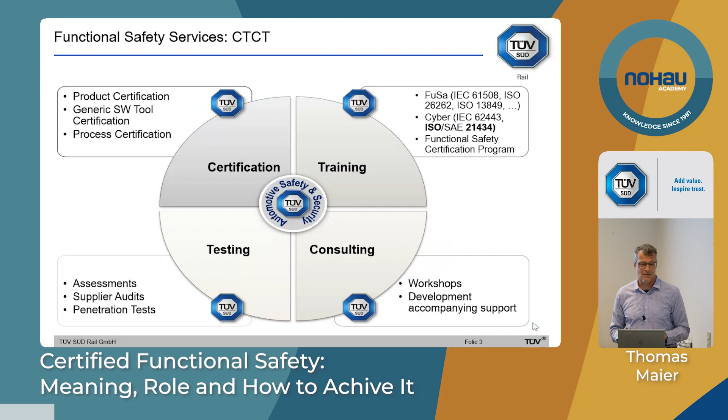And then we have a bit more informal services. We could call it advisory, more informal feedback, analysis, testing. So we do that kind of consulting or advisory to the extent that, of course, our status as an accredited certification organization allows us. We must not violate these requirements of independence and impartiality. So what we do is the same thing, the same activities that we also do for formal certification, just in a more informal way. That's what we can offer as advisory services.

All right, the agenda for today, or the topic, is certification, functional safety certification. So what is suggested is that we have a very quick introduction to the basics of functional safety. I'm pretty sure that many of you have quite a good understanding of what this is, just to set the framework for the rest of the discussions. What is it? What are the major challenges? And then in particular, we want to focus on assessment. What is that, and what is certification in that context in particular?

Ideally, something very similar. And we'll then also speak about what could be motivations for certification, why you want to do that. Also a little bit what TÜV SÜD wants to achieve here, what TÜV SÜD sees as an added value—so a bit of commercial talk, I think must be allowed. But yeah, we think it's a good service, so I will speak about this. And then in the end, a bit of the experience we have with the many projects we have with customers from all industries, from all over the world, at all levels—complete applications down to low-level elements like software libraries and hard soft IPs and so on.

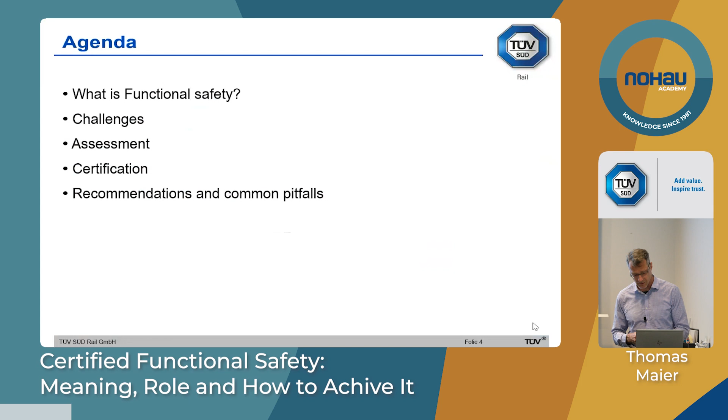Functional safety clearly exists if safety depends on the correctness, appropriateness, reliability, and integrity of control functions, of complex functions inside systems.

Such functions at a high level can be protective functions, functions that you add to a system to achieve safety. This could be typically some things you have in machinery, like light curtains, tread mats, safety doors, and things like this. You don't need these devices and their related function to actually have a productive machine. This is just for safety, just for protection of the workers, of the operators.

The other type of functions which can be critical are, of course, control functions which are essential parts of the product, of the device, of the machine that we're looking at.

A good example for this is, of course, automotive, especially with autonomous driving in mind, where basic driving functions have to be implemented using complex electronics and software. These are functions that must be there in the vehicle, but if they have a malfunction, then of course it will not be very safe. So you have safety requirements on these functions too. Another good example would be avionics, flap control, and so on. These must be made compliant with safety-related standards as well.

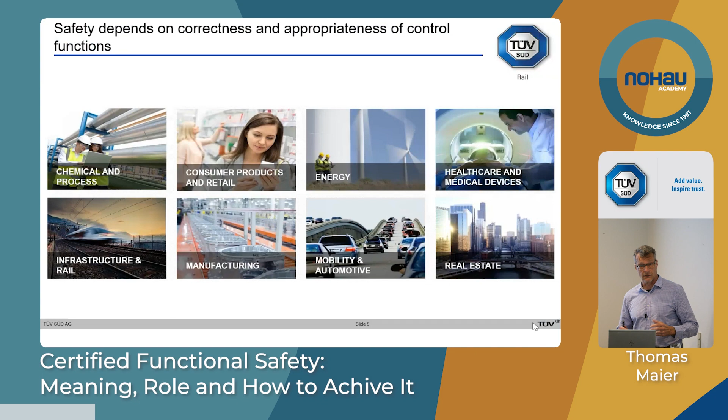The main issue, or the reason we do have functional safety standards, or functional safety as an engineering discipline, is the fact that we try to replace conventional technology, mechanical links between an input device and an output device, by electronic means, by computers and software.

So steer-by-wire, for example: instead of a mechanical link between the steering wheel and the wheels on the street, we got rid of the steering column and replace it with sensors, computers, and maybe an electrical drive that moves the vehicle. So you ultimately could drive the vehicle, the truck, even with a joystick, right? You wouldn't need to have a really mechanical device that gives some torque, and that torque is then fortified, amplified, and transmitted to the steering wheels.

That by itself, one system, is complex. Everyone of you who is an electronics engineer or software engineer knows that is very complex. Complex in the sense that the software that will run on the processors cannot be 100% fully tested. You cannot come across each and every state or each and every path at runtime. So you cannot run a full formal safety proof, product specific, right?

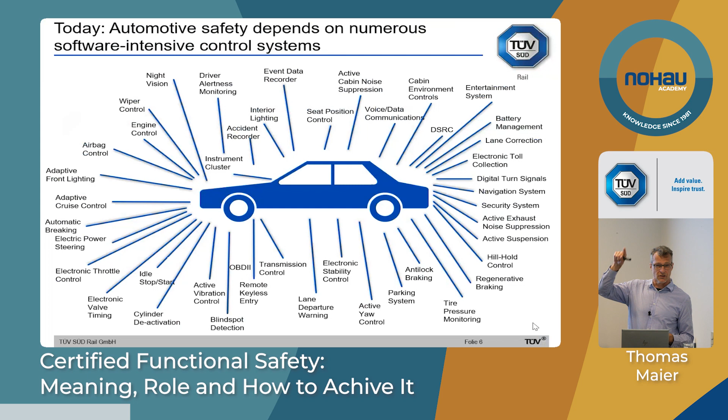And I think that complexity doesn't stop here, it keeps on growing exponentially. I think you had a good presentation by Hult with such an exponential curve for the Internet of Things. Same is true, of course, for automotive.

If we look into the very near future, we have more and more automation, automated driving being currently the holy grail of automotive. It requires more complex sensing, more intelligence, artificial intelligence. And we have a system of systems: a vehicle is no longer a separate machine, but it's interacting with other vehicles, interacting with the infrastructure.

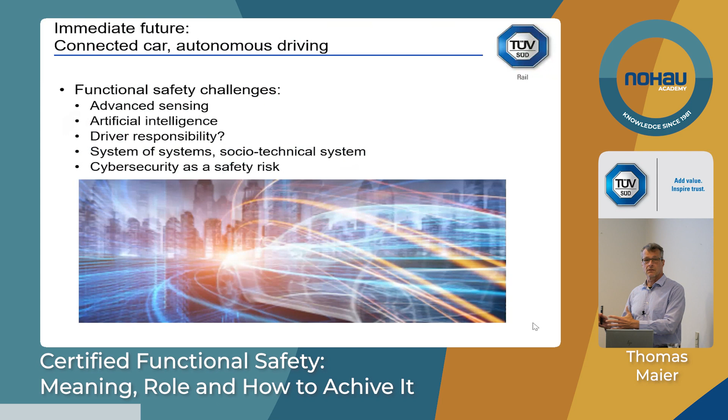To the extent that really more and more it gets clear that the automotive industry no longer can get away with being responsible just for the vehicle and making it safe, but it turns more and more into an issue of public safety, in fact. And this can also be seen in the regulations in relation to functional safety. We'll see that a little bit later.

What are the functional safety challenges?

Again, the basic challenge is complexity. First, that complexity will be a challenge just to identify what is safety, what are the safety functions, what are the malfunctions of safety functions, maybe interactions with couplings between different functions. The very first step, in fact hazard analysis and risk assessment that we need to do, is already more and more becoming an immense challenge in terms of complexity.

In machinery, maybe it's a little bit easier, most importantly because in machinery, if you pull the plug, if you shut everything down, everything stops, nothing moves, then in 99.9% of all cases you're safe. Okay, so that makes it a little bit easy. However, complexity is also increasing here on an application level.

Robotics, we have collaborative robots, complex interaction with the workers, with the operator. We have Industry 4.0, or the industrial Internet of Things also here. A lot of complexity is actually added.

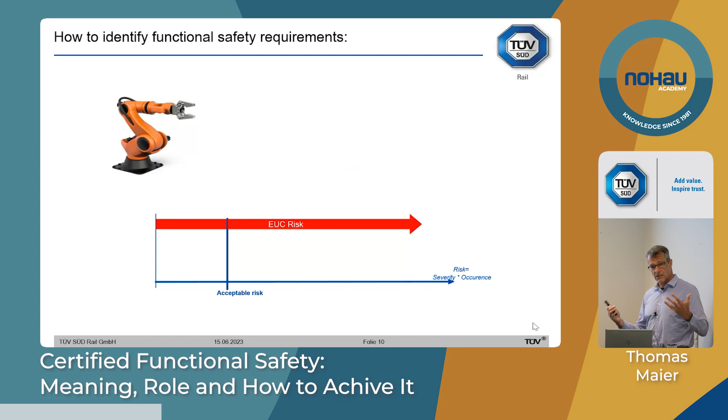But how to conduct hazard analysis and risk assessment, I think in the automation machinery context, it's essentially the standard ISO 12100, which has this approach: of course a robot like this is way too risky, it's a really dangerous machine in fact. You have to reduce the risk to what is acceptable.

What you could do, of course, is put the whole thing in a cage, then not really much can happen anymore. No one can ever get close. No workpiece can be flung off and hit someone either. But not a very usable system.

You want to have a door in that cage because you need to come close to teach, to maintain, to clean, or whatever, from time to time. So if you have just this door, then of course it may happen that you forget to close the door and start the robot up again, or someone is inside and someone else doesn't see it, wants the robot to work again, and switches it on again.

So that the risk reduction is no longer perfect here. To some extent, yes, to a good extent we do get risk reduction from these conventional means, and standards do require to do as much as possible with, let's say, normal, common sense, conventional risk reduction. Inherent safety is another term for this.

Only what you cannot really get rid of in terms of risk, that's where you would need safety guards, where you need protective systems. And these protective systems, typically especially the active ones, of course implement complex electronics. There's some sensing, there's some processing, and so on. Also, that may not be perfect.

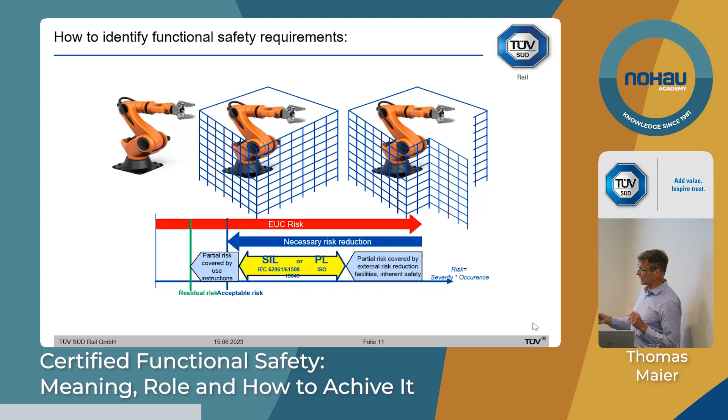The most famous one, of course, is safety integrity level by 61508 and derived standards, product standards. And the other big player in machinery, still dominating I think at the machine level, is ISO 13849 with its performance levels.

In automotive, you have a normative hazard analysis. It's part of the ISO 26262 standard. You always have to do it. First you determine severity, then you determine probability of occurrence.

The particularity in 26262 in automotive is that probability of occurrence is uniquely about exposure. You are only allowed to reason about how long, what percentage of time, or how often the safety of the driver, passengers, and bystanders depends on the fact that a particular function has no malfunction. You are not allowed to consider what is the probability of that malfunction. You may not consider it at the risk analysis step.

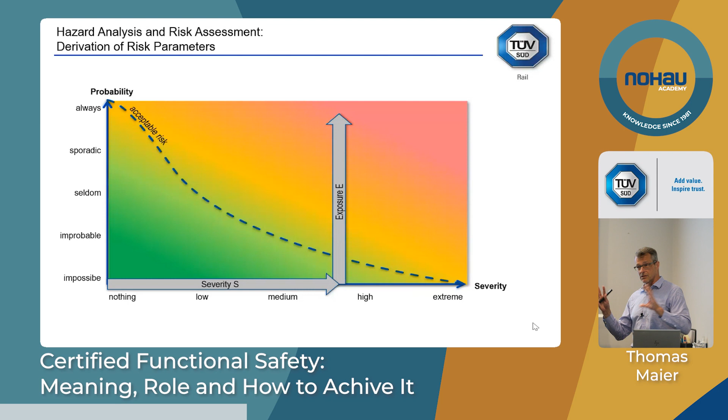How about the other safety goal, to not explode unintentionally? How often does safety depend on this malfunction not happening? All the time. Whenever you sit in front of the steering wheel, your safety depends on this thing not just going off spuriously. So you have an extremely high exposure rate.

And then there's also driver responsibility, controllability. The driver is expected to be compliant with the law, have a driver's license, respect traffic rules, not be under the influence of drugs and so on. If everything goes wrong, in some cases the driver may still mitigate, maybe reduce the severity, or maybe dodge the collision to reduce the exposure. Anyway, you will end up somewhere up here, and this is not acceptable.

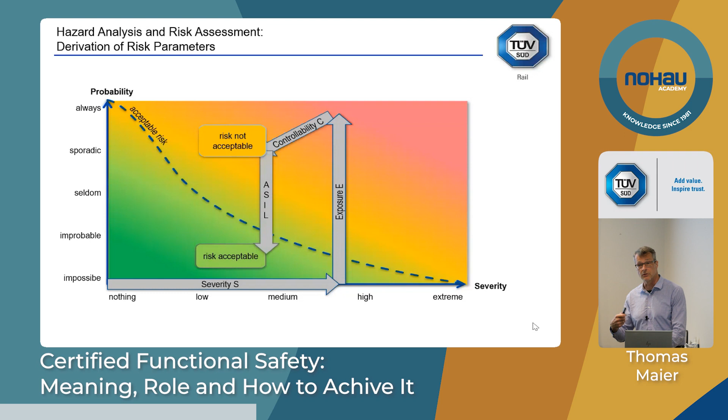And that's now when we reason about integrity. That means that particular function must be implemented with appropriate integrity to reduce the risk to an acceptable level. Once we have identified functional safety - the functions, the malfunctions - and identified the risk level associated with it, then we need to achieve functional safety by achieving that integrity.

And this is really where we can say the SIL, ASIL, or performance level have a double role. Up till now, SIL, ASIL, performance level was simply a metric of risk, or required risk reduction. Now these turn into technical requirements, in order to implement that particular function with commensurate integrity that provides this risk reduction down to an acceptable level.

Safety integrity must mostly be concerned about the fact that things go wrong. In hazard analysis for functional safety, the main hazard is malfunction of an intended functionality. So we reach integrity if we make sure that these malfunctions don't happen, or don't happen too often. So we need to be failure focused.

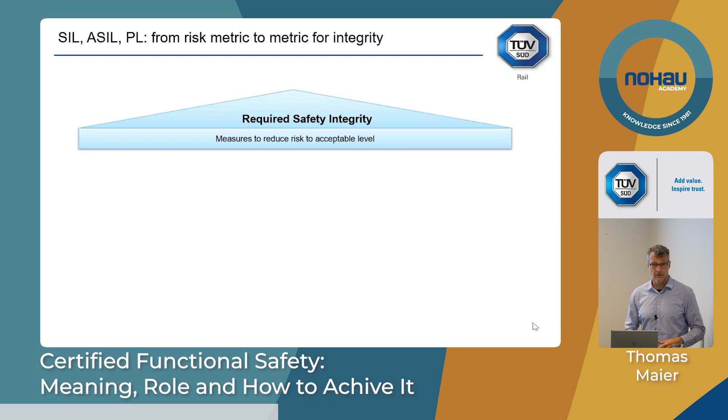That's the fundamental mindset of a functional safety engineer: not to think only in positive terms about the thing you want to do, the great new feature for your vehicle, the great new function in your robot. You have to always think about what if something goes wrong.

So you have to have this critical attitude to your own work. Failures and faults are classified by all standards into two main categories. First, the traditional, classical, old-fashioned safety engineering one: hardware components, and everyone knows these will fail. They have a failure rate, a useful life, a B10 value or whatever.

At some point in time you have a failure, so we must have a design that is prepared for it, that can tolerate it through redundancy, that can detect it through diagnostic safety mechanisms. We also want a good level of reliability of these components. Standards state requirements about such a concept and architecture based on redundancy and diagnostics in a quantitative way. Under a particular SIL or ASIL, you have metrics which quantify the goodness of an architecture to control random hardware failures.

The other type are systematic failures. Why are they called systematic? Because they always occur and manifest themselves in precisely the same way. According to the standard, there is no randomness to it, it's more deterministic: if certain conditions are true, the fault will happen, the failure will happen. The main root cause of systematic failures is not the laws of physics, as with hardware, but ultimately human mistake, human error.

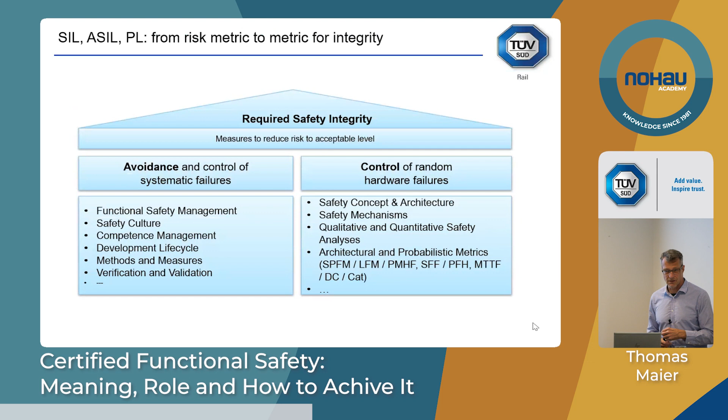How do you avoid making defects, how to avoid making bugs in software in particular? It's hard work. You have to follow good processes, good documentation, try to be formal to the extent possible and appropriate, and do a lot of testing, verification, and validation. These two types of faults are reflected by two types of requirements: process-specific requirements like functional safety management, processes, methods and tools, and product-specific requirements that tell you how to construct a good safety architecture.

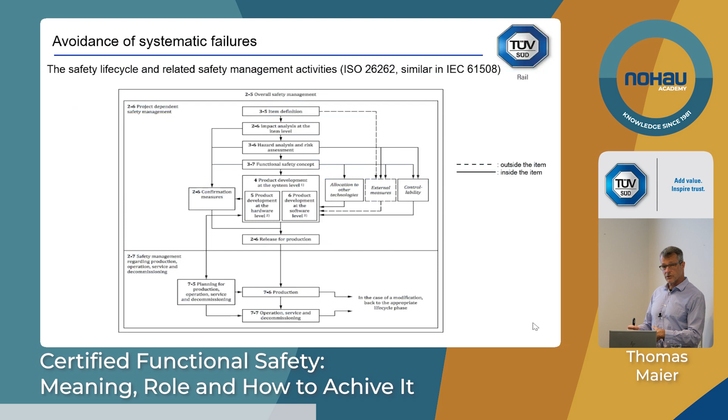Just quickly, some visuals here. We won't discuss this in detail, but for avoidance of systematic failures we have processes, methods, tools. We have a high-level safety life cycle, functional safety management, and based on this we have detailed processes, especially on the software side.

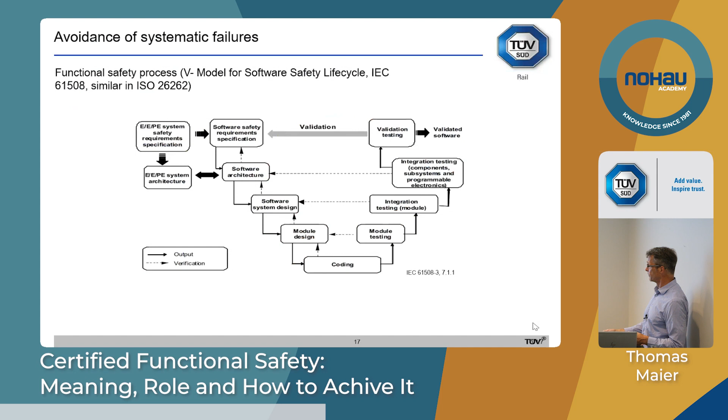That's one of the key aspects of the V-model. Within each of these phases, you have very detailed requirements specifying exactly what techniques, measures and methods you have to apply, depending on the safety integrity level you want to achieve. The higher the safety integrity level, the more rigor, the more highly recommended items you will find in the corresponding columns.

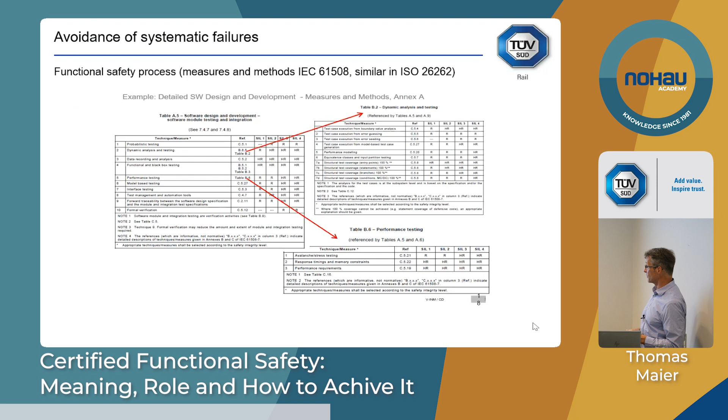And of course, fail operation would mean you cannot just be happy with detecting a discrepancy. You must locate the fault. You must know which of the two channels has faulted.

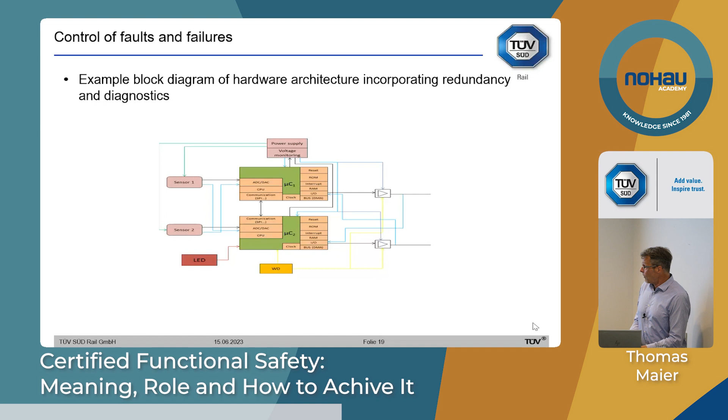All right, so identify safety and then achieve safety. Then we're safe. Are we done?

Not quite, because things change, especially if they're software intensive. They will be modified. The positive view is that you have good interest from customers, and they come along with new features they want implemented. That's the positive thing. The negative thing is that you have field returns and bugs you need to fix.

Doesn't matter, in every case you have change, and a big challenge is to maintain the safety integrity if you have change. And how do you do this? Well, this comes again back to the processes.

You need to have good processes in place, especially good change management based on impact analysis, and such an impact analysis, in order to be able to make it properly, to know what is actually affected, what are the impacts of a change.

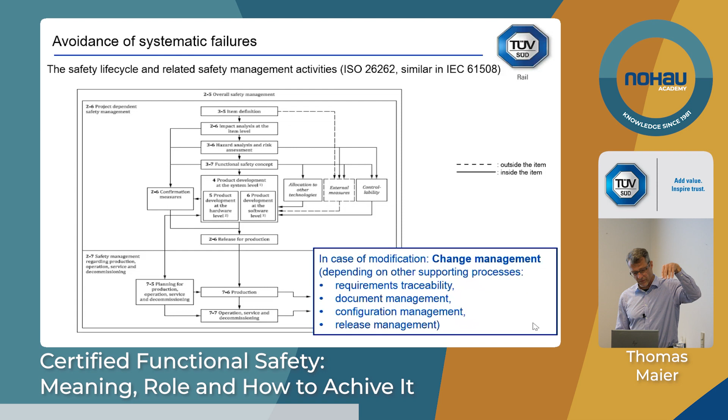We need requirements traceability. That's a key measure, in addition to the V model, which standards require for achieving systematic integrity. And requirements traceability really is required to be white box traceability from high-level requirements, a vertical traceability into the design, into hardware design at the lowest level, into software design, down to unit level, function level, maybe even lines of code level.

Document management, and then also configuration management, release management, to make sure that a particular, fully assessed, validated, maybe certified version is actually released into the factory floor or onto public roads.

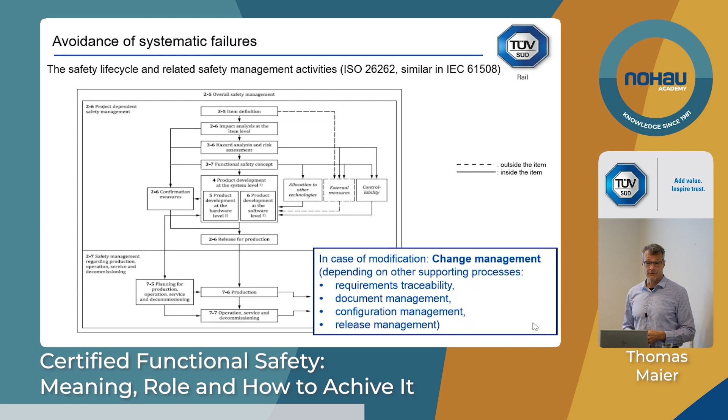All right, then we're done, right? Or is there something missing?

Well, this is very good. However, it's only half the value, or maybe has no value at all, if we cannot demonstrate that we have achieved it, and if we cannot demonstrate that we maintain it. So we need to demonstrate, we need to prove it to ourselves as the manufacturer.

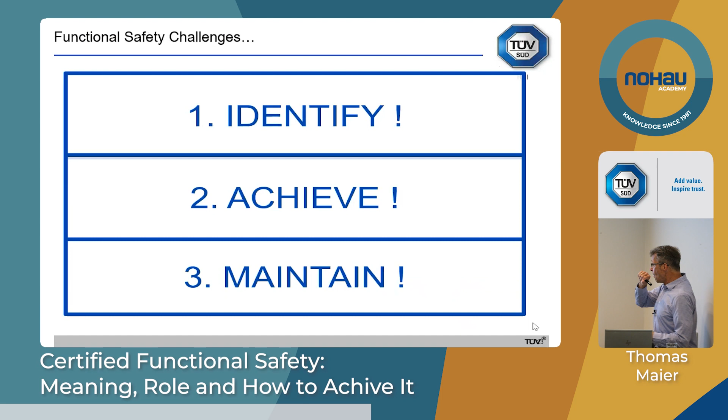We want to have, of course, a safe product. We don't want our customers or end users to get hurt. And we have to demonstrate it.

That's the real challenge because of the complexity. So we have to demonstrate to ourselves, we have to demonstrate to our customers. If things go very bad, we may have to demonstrate to a judge, to a lawyer. If an accident happens and everyone looks for who's the culprit, who has most of the money, I don't know, then we need to be able to demonstrate that we actually have achieved safety.

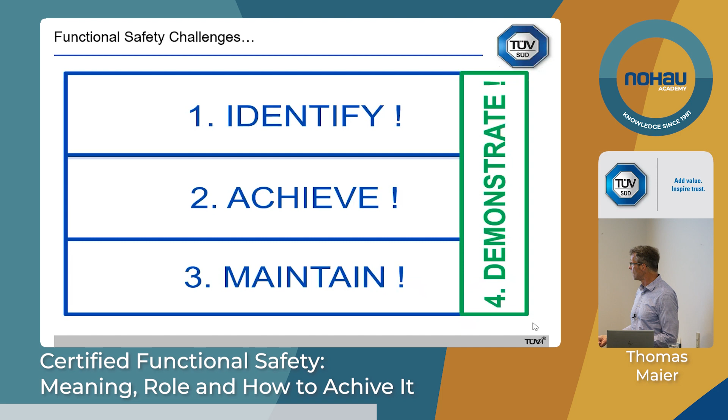And that's where, let's say, the ultimate level functional safety assessment comes in. That's the final, ultimate judgment that a product is safe, functionally safe. But if you try to find out in the standard, try to read them carefully, what actually is required, how do you do a functional safety assessment, what are the precise activities, it's a bit vague.

It's a bit vague, in fact, especially in 61508, I think. 26262, I think, has an improvement here. It does something that hopefully the third edition of 61508 will include as well.

It really says, well, we have to look at the complete body of evidence to come to the judgment that a product is functionally safe according to the requirements. Of course, we have to look at the product itself. We have to test it properly, all the safety mechanisms, safety measures, diagnostics that are implemented.

We also have to look at the complete technical file. All the work product documents that have been created must be looked at. And we also need to care about systematic integrity. We also need to look at the processes, audit the processes, all that. Everything you have to look at.

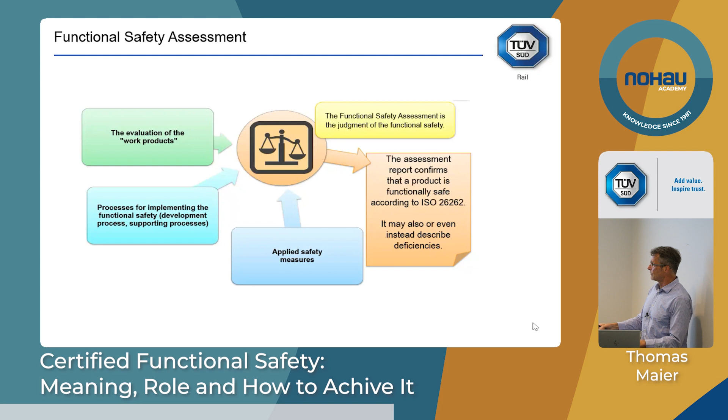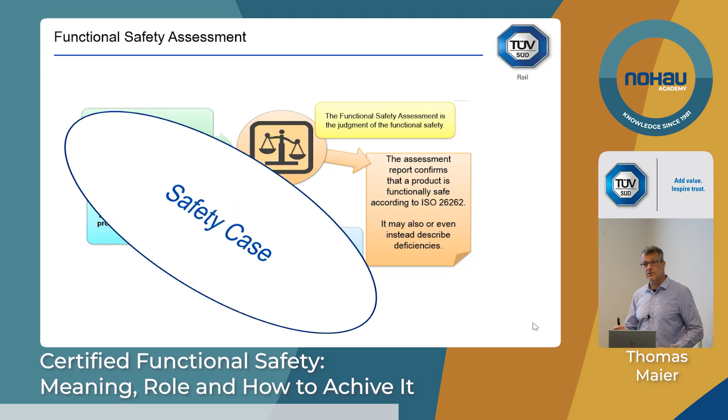And all this compilation of evidence, all this material, should combine meaningfully into an argument. And if it does that, then hopefully you can call it a safety case. That's the term that 26262 uses. It's certainly not one that 26262 has invented. It has been around for many decades, since the 70s, clearly, I would think. But it's about building a safety case. That should give you this confidence, really.

What is a safety case? Well, it's defined in the standard as the combination, the meaningful accumulation of all the work products that you do. That's what the standard says.

For safety case, it's a discipline, safety case engineering, and there are universities, especially University of York, which has been pioneering this work. They came up with a notation for it, Goal Structuring Notation, a really fine thing which you can use to get structure and order in this huge amount of documents that you have to create.

What I'll show here now is not really an introduction to GSN, Goal Structuring Notation, but more a dummy or toy version of it, just to show the important aspects of it.

First of all, you have a claim that ultimately the safety goals or safety requirements that you have identified from the hazard analysis are appropriate, correct, and complete. That you have defined safety correctly, that you have done a good job in hazard analysis.

And then if these requirements are implemented, refined, ultimately designed, implemented, refined completely and correctly, then we have achieved safety. Of course, we need to have some argument in place to support this claim of completeness and correctness as we move down to the lowest level.

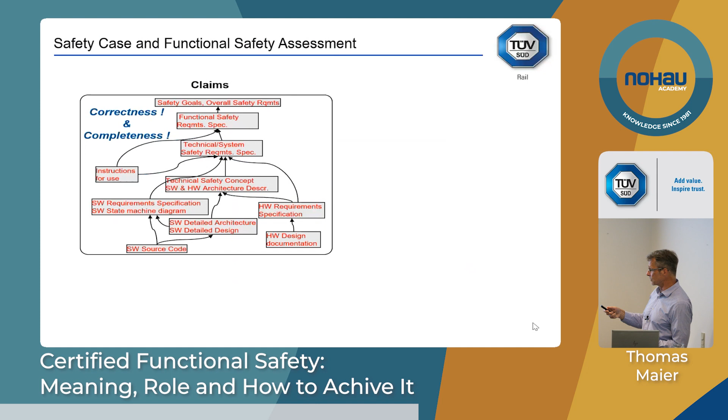These arguments come from the evidence that we get when doing all the verification types of activities, the verification types of work products. That's testing, review, inspection, and also many analyses—safety analysis is in fact a kind of safety-focused verification activity.

Even on the quantitative side, the calculations that we can do based on a hardware component level safety analysis using the FMEDA technique. Right, we're not quite done yet.

There's this word compliance—we still need compliance. Why would we need compliance with the standard, tick off all the requirements, if we have already correctness and completeness in the implementation? Well, it's because the evidence that we have here is not sufficient.

We cannot test 100%, as already mentioned. So we have to rely on processes, you have to do process audits, review safety plans, and all these things. That gives us the arguments for compliance.

Because ultimately, there is no absolute 100% proof possible. The only thing we get is a level of hopefully sufficient confidence. So something that is compliant with a SIL or an ASIL is no absolute term that this is absolutely safe—it's a level of confidence.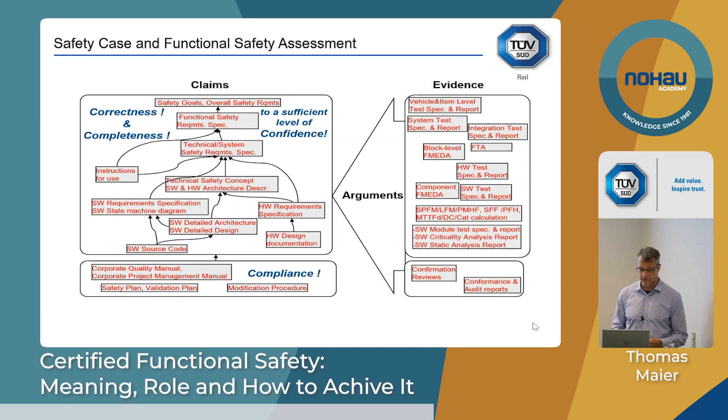Okay, and certification—what is certification in this context? Well, ideally, it's really about achieving confidence. The term certification is not really well defined, especially not in the standards. It doesn't appear anywhere in the standards.

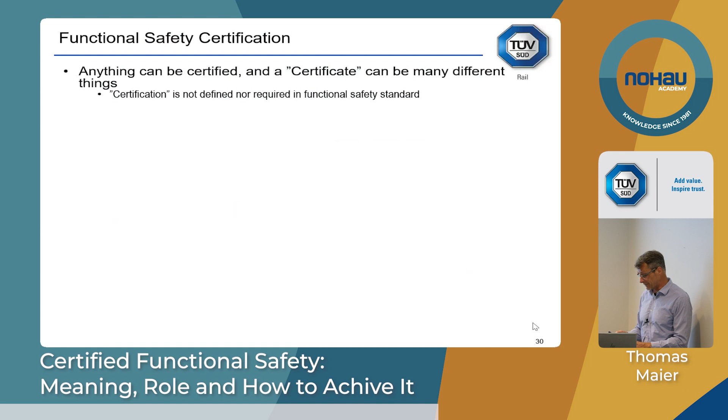So certification can be anything. You can have certificates for all kinds of things. What, of course, TÜV SÜD and all our competitors who are in this area—the TIC area, testing, inspection, certification—

what we would want it to be is clearly a certification, approval, listing, recognition, or something by an independent, accredited, competent, or notified, recognized organization or body—there are different terms for this. Okay, that's what we want to do.

Certification is often required by laws and regulations. Especially in Europe, we know clearly the regulations or directives, and many of those for many years had in fact a direct link to functional safety via the so-called harmonized standards.

You know very well in machinery what these are, and lift directive—there are similar standards, ultimately all referencing the 61508 standard. A bit of a special case in medical devices, the standards can be considered a bit weaker there, but for pressure equipment, ATEX, 61508 is at the basis of it.

Automotive—not sure how many people work in automotive business in Denmark, probably not so many—could keep too strong regulation out; especially functional safety was not really in, let's say, the automotive framework directive until now. Things are slowly changing.

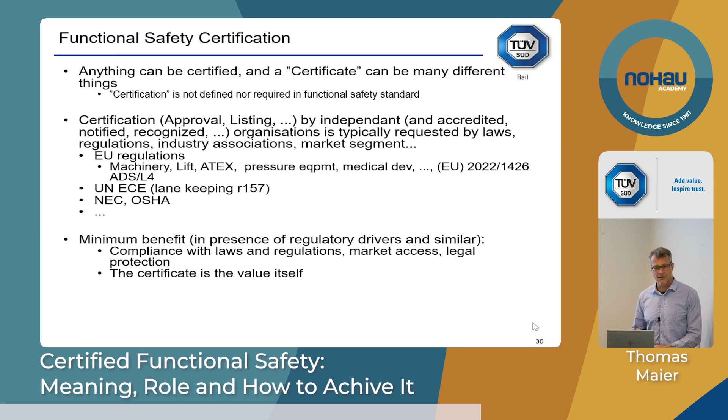So the minimum benefit of a certificate is clearly to show compliance with regulations and laws. That's the minimum benefit. We do have customers from time to time that really just want that paper. Give us that paper, we have this machine that has been safe for 20 years, can you test that it's safe? That's what we get sometimes as a request.

What we think at TÜV SÜD, and what I think also many of our customers think, customers with good safety culture, is that certification should give an increased level of confidence that something is safe. That's what we want to offer as a service, and that's also what we need for our own sake. We need to make sure that the only asset TÜV SÜD has, this blue octagon, is inspiring confidence in safety.

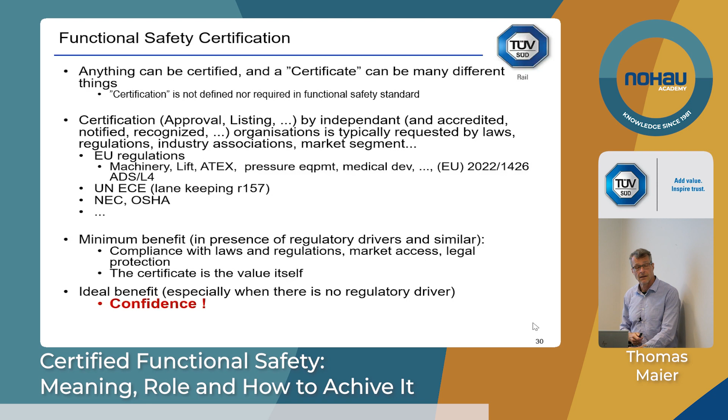What is certified? I've shortly mentioned this already at the start: all these products primarily at all levels, typically as generic components, SEOOC or compliant items. Things like ECUs, PLCs, sensors, drives, valves, at a subsystem level, and then even at a component level, part level, complex ICs, and also software components, libraries, all that.

Tools, as already said, are kind of a secondary job for us, because there seems to be a market drive to have tools also pre-qualified. There's definitely no regulatory driver for this, but the market requires it, and we get quite many projects for tools. Or process, just an organization, as maybe a preparatory activity before really embarking on complex system development and compliance. And this is just training and passing an exam.

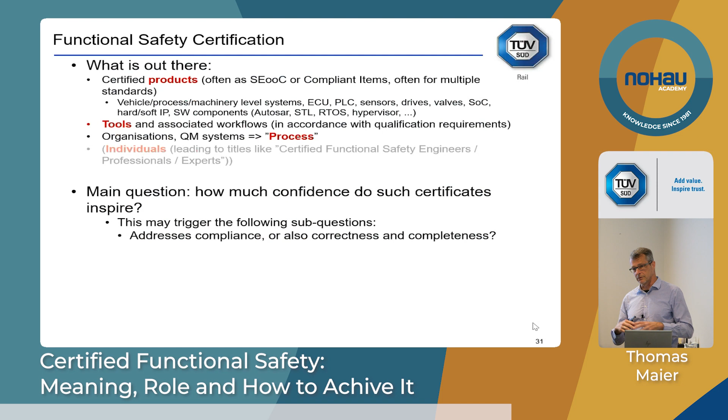If you want to achieve confidence, if a certificate should inspire confidence, how can it do that? This maybe triggers some sub-questions. Does the certifier really go in depth, checking correctness and completeness, understanding the technical design? Or is it maybe more a compliance case? You really cannot know what a certifier does. Do they just tick off boxes and requirements, or do they spend the time and effort to really, in a project-accompanying manner, work with the customer, go inside, understand the complex design inside out?

If you do that as a certifier, if you claim to do that as a certifier, as I would definitely claim TÜV SÜD does, then the big question is to what extent do you do this? You cannot definitely redo the complete verification part of a project, that would be a ridiculously expensive certification project. So you have to get smart about it. This means you have to do spot checking, you have to do sampling, but not in a random way, you have to do it in an informed way. The challenge is to get confidence within a limited amount of budget. Clearly.

And all this is only possible if there is sufficient technical competency in the certification. You must understand the technology, you must understand the application. And also, is it a one-off certification or is it a surveilled one? Is there a yearly follow-up?

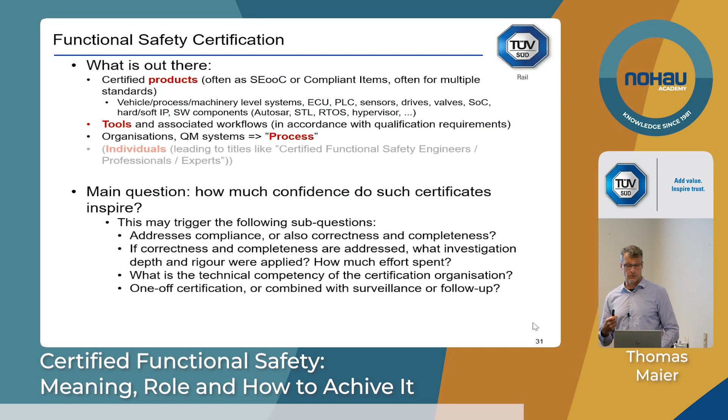What does TÜV SÜD do more in detail? Well, to achieve that confidence, we work development-accompanying from the start, ideally. We cooperate with the customer, give immediate feedback on all the steps, all the products, all the work products or documents that have to be done in accordance with the process of the standard, covering all applicable phases and work products or documents.

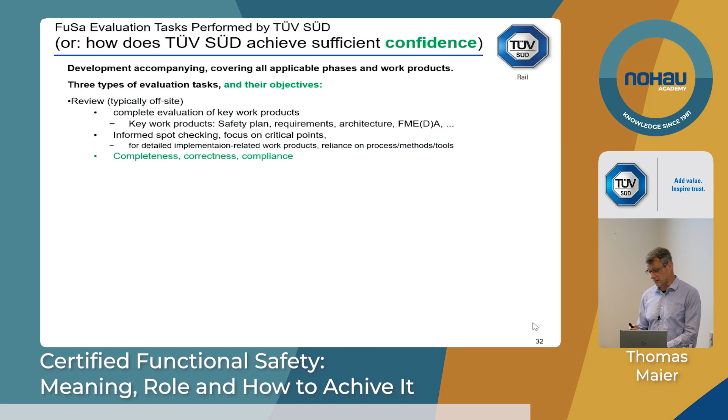Roughly, we distinguish three types of tasks that we do. The most important one, maybe 80% of the effort, really is review - document-based, work-product-based review. Typically this can be done off-site, covering some key work products, especially architectural ones, requirement-related ones, and also analysis documents.

Work products, which also ISO 26262 wants to have confirmation reviewed, so we have an overlap with what 26262 requires there. So we really have 100% review there. We go very much in depth. We need to understand the architecture and the requirements. That's like building a house or a building - the statics must be okay, you have to look at that.

When it comes to more detailed documents, implementation level work products like source code or unit tests, or huge FMEA tables - a controller with 1,000 components, each with on average 5 failure modes, gives a huge FMEA table. So we will not look at every failure mode to see whether they calculated it properly, but we know from our understanding of the architecture where the weak points are, where it's interesting to drill a bit deeper.

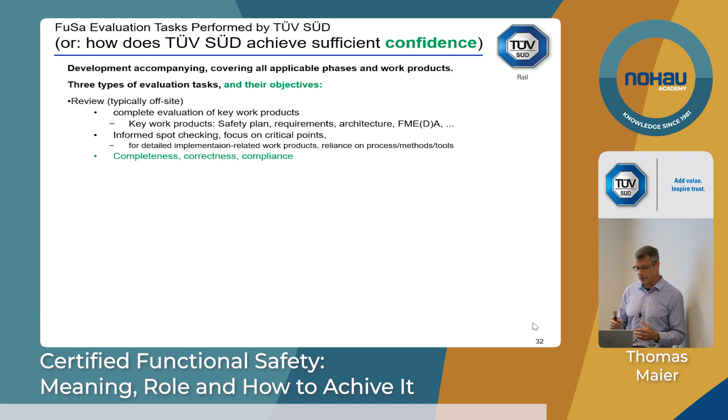We also typically have two on-site activities. One is test witnessing - our accreditors ask us to do that. We select some test cases, go to the customer, and observe them as they are executed or re-executed by the customer. Not to find faults, but to get confidence in the ways of working of our customers. If we should find a fault in this testing, if a test fails, that actually means we have not done a good job in review - this is something we should have already seen, ideally, at review. So this is not about fault finding, this is about establishing confidence in the ways of working of our customers, to whom we want to give a certificate.

And the last one is the auditing aspect. We have a proper audit with an organization, going through the process and specific requirements of the standard, a dialogue with customers. Ultimately, we want to see that there is good safety culture present.

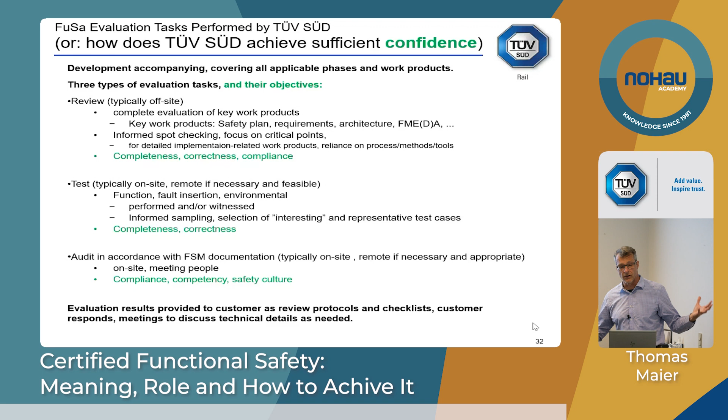We communicate typically by review protocols and checklists - we have a whole infrastructure for it. Review protocols are really used to exchange information, and we capture all the discussions and meetings needed to discuss technical details until all the findings we have are actually resolved. All these checklists and review protocols need a whole infrastructure and process as the basis for our accreditation.

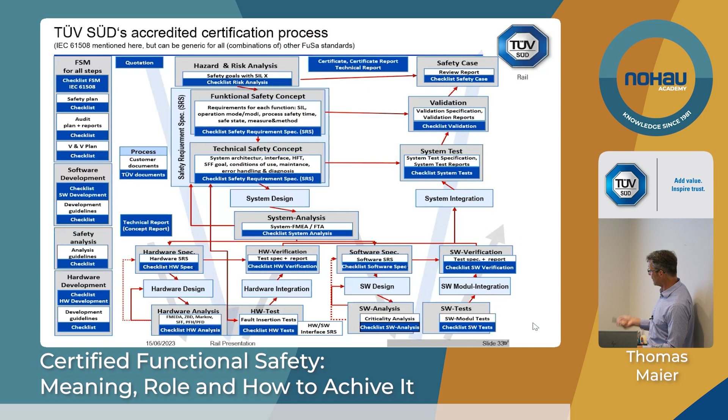That's just to impress you a little - we won't discuss this, but those are all the dark blue boxes showing where we intervene, as certifier, in the project with the customer, where we have a review protocol, a checklist, a test report, or whatever.

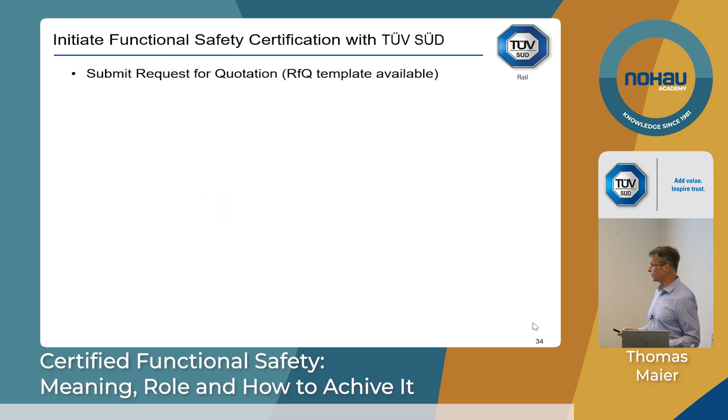How to initiate a functional safety certification with TÜV SÜD, should you be interested: very informal, just an email to me or someone else at TÜV SÜD. We can give you a template for a request for quotation, which has a lot of important questions for us to understand what effort is to be expected to build the confidence. We need good understanding of the product, technology involved, the functional scope and complexity. Also very important, to what extent pre-certified components are used - it's a big difference whether someone uses just a standard processor and develops all the software themselves, or whether they use pre-certified, pre-qualified processors, and pre-certified, pre-qualified low-level software components like HAL or STLs and so on. And also whether it's the first time for you or whether you have some experience in functional safety - that's important too.

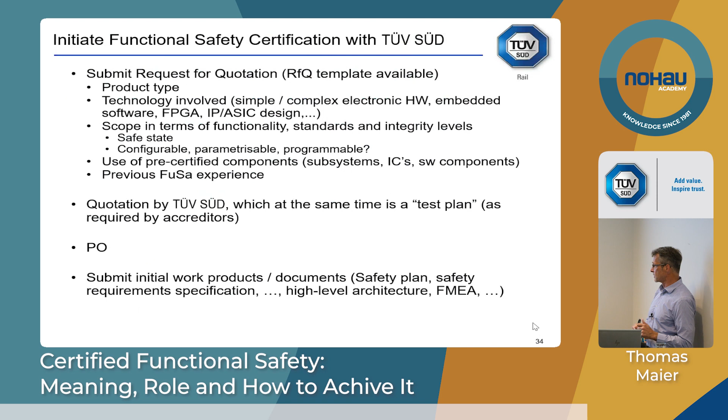You get a quote back, and then you order, and we get started. You submit work products as you do them, following the process, and you get immediate feedback from us by review protocols. So we continuously work with you, accompanying you throughout the complete development project, and we can have all the meetings, even workshops, as necessary to really come to solutions if we have findings that are hard to resolve.

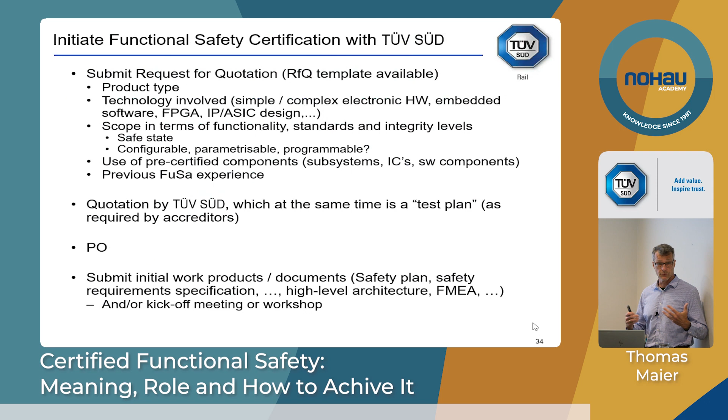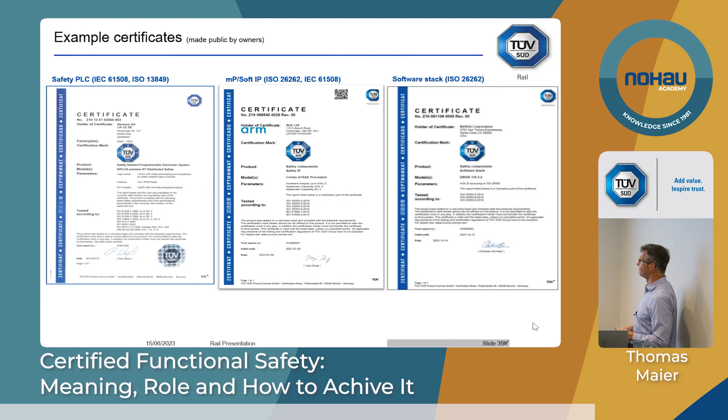And then it may end up with certificates like this, if it's from TÜV SÜD - at different levels: subsystem level, safety PLC, IC level, microprocessor or soft IP as in this case, or also pure software-only components, SEOC elements, like this example here. These are certificates published by the owners - we only publish certificates where the customer wants that.

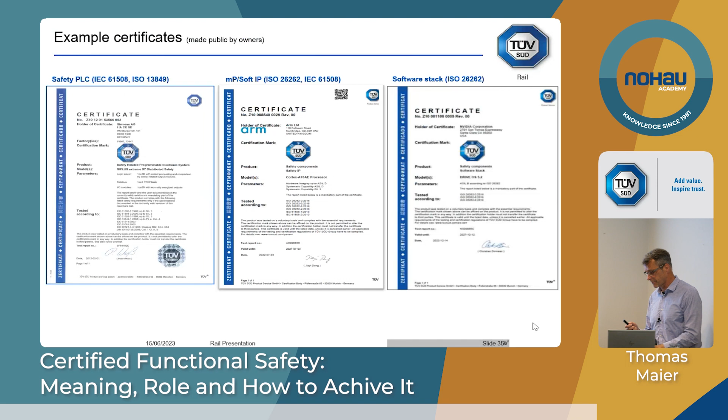Yeah, and the last two slides with some good advice. Many of that is quite obvious, and much of that I think I already mentioned.

Ensure basic understanding of functional safety within your organization. That's important. Training, really, we do recommend it if you're really new to it. That's the basic. Or maybe hire someone who's able to do that, or work with external partners. Involve TÜV SÜD or the certification partner as early as possible. That's really important.

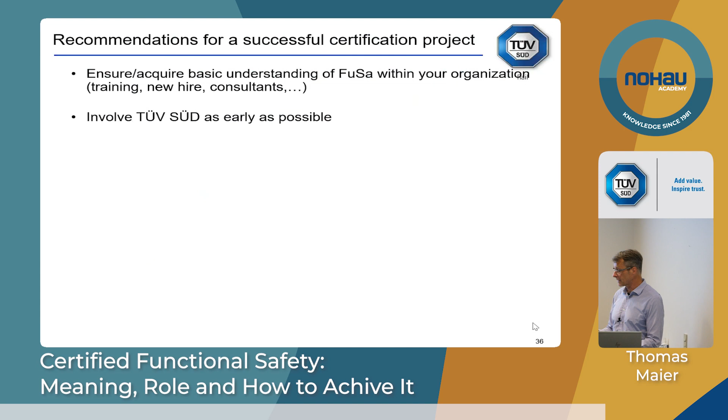Basic quality management should exist. Something in the direction of ISO 9000 with the main supporting processes like change management, release management, also skill management or competency management - all these things that are required by the standard. Ideally, you have that already as, let's say, a quality conscious company, and do not have to reinvent it.

And even further than that, good practice in embedded systems and software engineering should be there too. Good quality, good level of testing, documentation. If you have that, that is 80-90% of the standard, especially on the software side, maybe 95% of the standard. Functional safety standards do not require something out of that that would not be common sense, that would be rocket science.

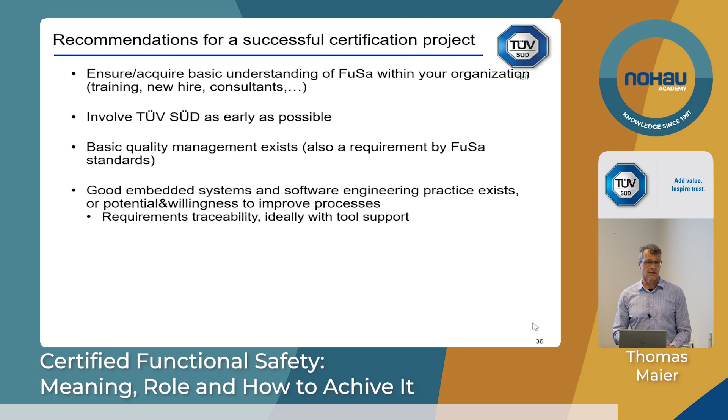Or anything exotic. One thing I want to repeat over and over again: requirements traceability, very important, and ideally supported by tools, really, because doing this manually may work for a simple system, for a simple, I don't know, STO on a drive, may be okay, but as soon as it gets more complex, you want to have tool support for requirements traceability.

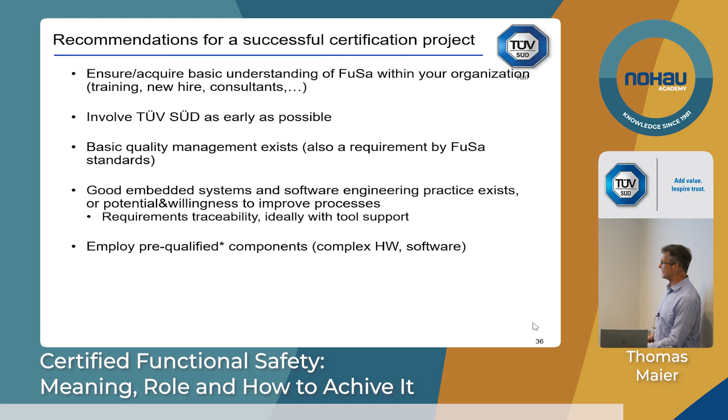We had many PLC projects where they're trying to do everything manually. It is the horror, okay? It's really something we strongly recommend. And then pre-qualified components, I already said this, pre-qualified tools, also don't have to bother about

qualifying your tools or compilers and all that. Yeah, so that's of course another recommendation. When we say pre-qualified here and you want to have an accredited certificate by TÜV SÜD, then also this pre-qualification means that it must be done by another accredited body, another TÜV or whoever offers accredited certification. Only then can we accept it black box, only then can we accept it on face value.

If that certification is not accredited, then of course it still helps if there is good documentation available from the vendor, from the chip vendor, or whatever the component is. But we have to formally evaluate it ourselves then. And that's of course a cost factor.

That's why we ask for this. That's an important question in our RFQ template: Do you use pre-certified components? And who is the certifier? Are they accredited? That's important.

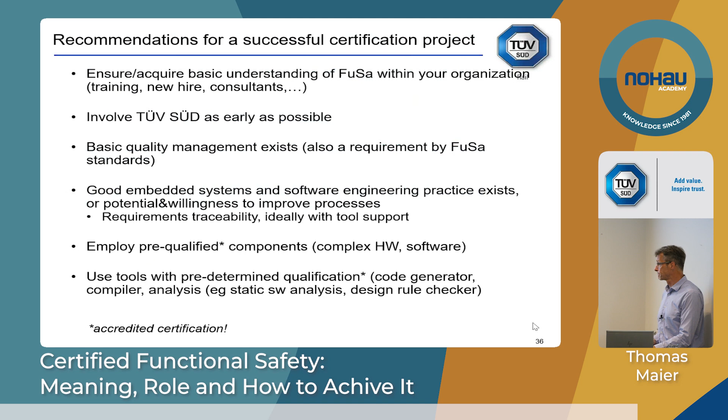Common pitfalls: one is poorly defined, poorly understood interfaces. And that's, of course, very often the case if it's not really maybe a generic component, but a bespoke solution for a customer. We see this in marine.

We have marine customers very often where they kind of find out, okay, we need this. Our customers get approached by their customers, who tell them we need this SIL thing. So, okay, and then they go ahead and make a system - marine control system, navigation system - based on redundant safety PLCs and all kinds of stuff, and have a great architecture, come to us, and then we find out, well, what is the input? What are the sensors? What are the joysticks or whatever that the captain uses?

Or we don't know. Are you clear that that must be still compliant too? And are your interfaces prepared for this? Well, we haven't discussed so closely with the customer. They're not very competent because they have to go back to their customers, and then the project stops for three months because their customer finds out that they have to, of course, have the same safety integrity level on their side too. Yeah, that's one thing.

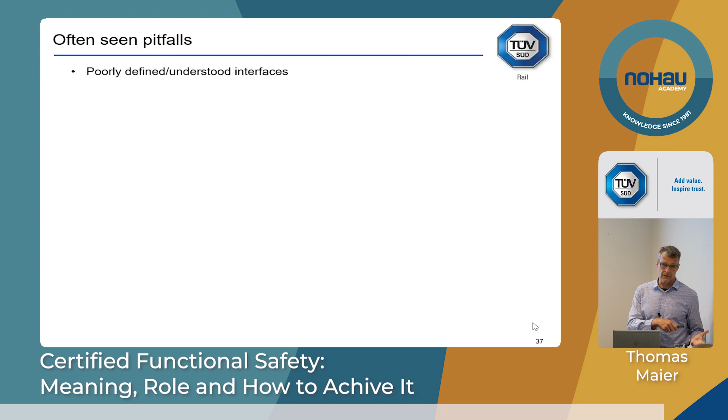What is, let's say, the electrical concept of the input? Is it dual pole, or is it plus-plus or plus-minus switching, or is there a serial data interface or serial data communication? You must be very clear about these things, otherwise you maybe do a product that is not as successful as it could be if you reflected all possible interfaces, all possible other industrial safety components you want to get connected with.

Power supply, then secondary voltage regulation—that's very often an Achilles heel. Remember that redundant block diagram before? Great, but if they are supplied by the same power supply, if there's an overvoltage, your redundancy is gone. If you have a claim of category 3, category 4 at least, or HFT1, then this applies also to your power supply. You have to have redundant secondary voltage regulators, or at least a redundant monitoring of your voltage supply, to be able to claim fault tolerance or categories 3 and 4.

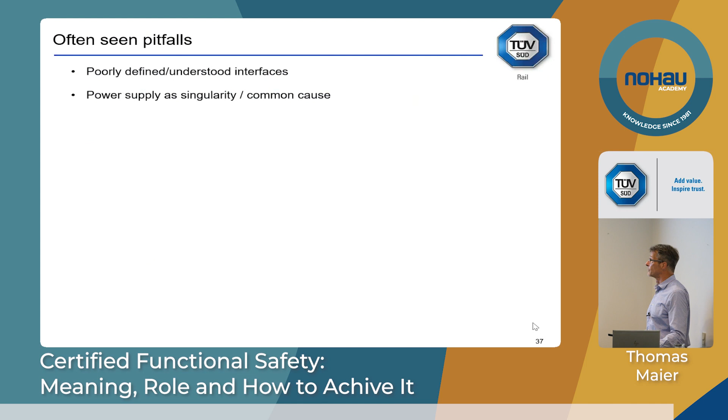Smart sensor diagnostics, if you have complex sensors—it's a bit the same thing as before. Complex sensors, you cannot cover them anymore by simply comparing. They must have their own internal diagnostics.

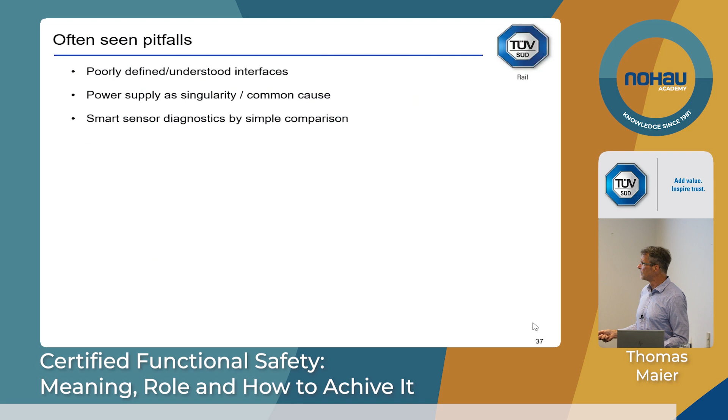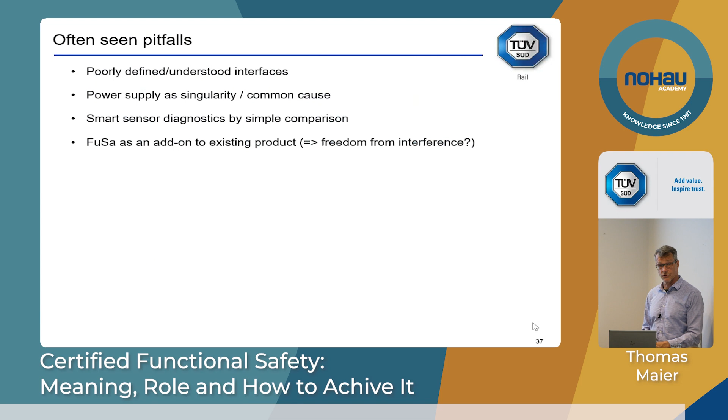Adding functional safety as an add-on is very difficult, because you cannot just add some safety-rated software. You have to establish freedom from interference. Normally you can only really do that if you also spend some additional hardware components, especially because for temporal separation you need an additional clock at least. You need two sources of time information, otherwise you cannot achieve independence, freedom from interference from a timing perspective. Spatial separation, I think you can do a lot software-wise, but when it comes to timing, you may have to change your hardware architecture—fundamentally change your product in order to add functional safety or make your existing product functional safety compliant. Duplication, even simple duplication of a product, has the same issue—that's a common cause issue, you need diversity.

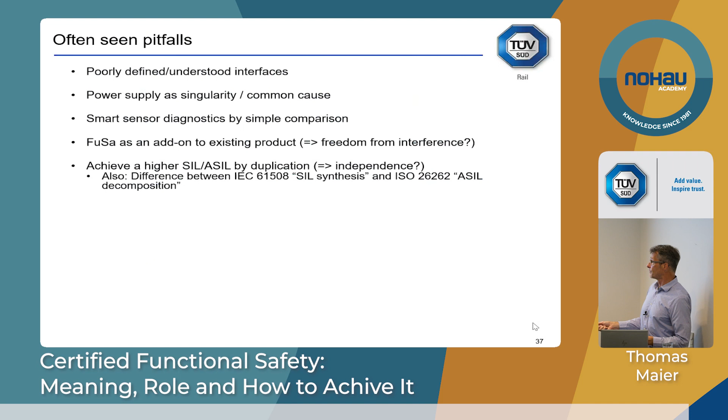There's also a difference between the two main standards here—they work a little bit differently. Need to be aware of that.

Proven in use—well, that's a whole big topic. Short answer is, TÜV SÜD's answer is: not allowed. We simply send you back home if you want to apply proven in use for software.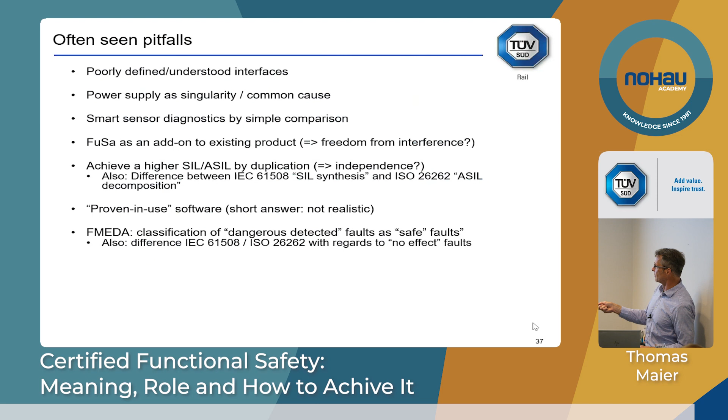FMEDA, classical fault: faults which actually are dangerous but detected get classified as safe faults. That's very often a very hard job, to say, okay, if this goes wrong, it will be caught by this and go into a safe state, so you mark it as safe. We always see these faults—even experienced customers find it so hard to abstract from the fact that you already have safety mechanisms and diagnostics. So we always have comments, always trying to find this issue. Be aware of this.

Also, if you do products for both standards, lower-level products, make sure that no-effect faults are considered differently in these two standards. 26262 in fact allows no-effect faults to be classified as safe faults, so they help you get a good metric, SPFM and LFM. Not so in 61508—no-effect faults must be kept out of the SFF, safe failure fraction calculation. So there can be some incompatibilities between the two standards.

Unit tests and claiming structural coverage by just generating test cases from source code is not sufficient. Structural coverage must be achieved by requirements-based testing. Of course, you can apply test case generation, you can apply a tool like TESSY, it's a great tool, but ultimately you must be able to trace the test cases back to requirements. You want traceability—that's very important.